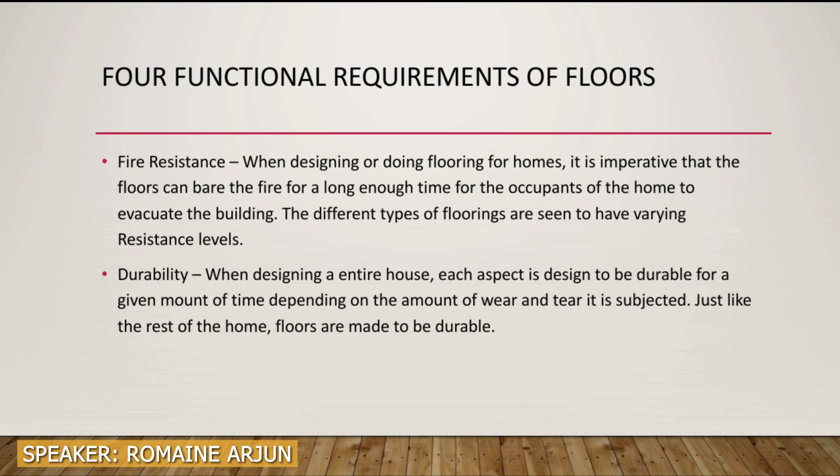The next functional requirement is the durability. When designing an entire house, each aspect is designed to be durable for a given amount of time depending on the amount of wear and tear the floors or the home is subjected to. It is very common that a home is designed to last. So, as such, the flooring would be specifically designed to last as long or even longer than the home itself, as the floors would be bearing more load than most of the other parts of the house.

Another functional requirement is the resistance to weathering. Houses are built on different soils of different areas with different water tables, which can have different moisture contents or moisture conditions of the soil. For floors, depending on the design and the soil at hand, this could affect the ground moisture and the resistance to weathering of the floor. So, the floor will be designed in a specific way to resist the weathering.

And last but not least, the strength and stability. The strength is linked to the durability of floors. Floors are made to have a high level of strength as they are subjected to different and varying loads, whether it be human, objects, furniture, etc. Maybe even vehicular loading. The stability of the floor is to ensure that the floors remain level.

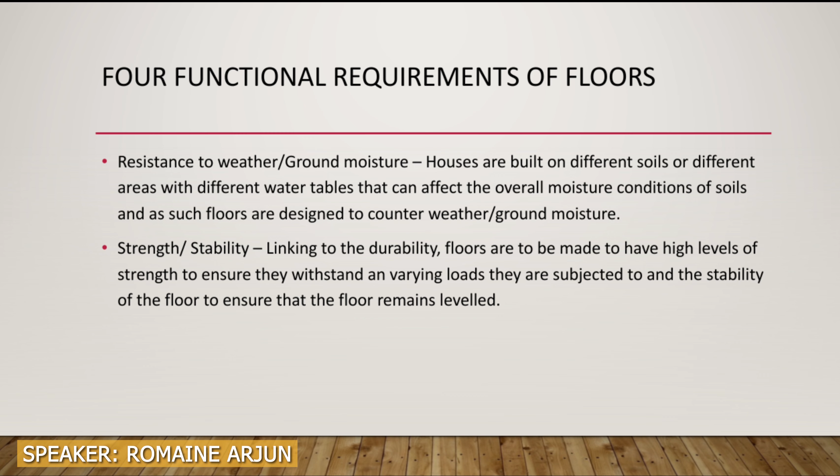As such, when items such as furniture are placed on the floors, it can be seen that the floors will be subjected to more load in certain areas than in other areas. This can cause the floor to be unlevel depending on how well the floor is made. So the stability of the floors should be taken into consideration during the construction process to ensure that the floors will be level for the varying loads and for the varying time.

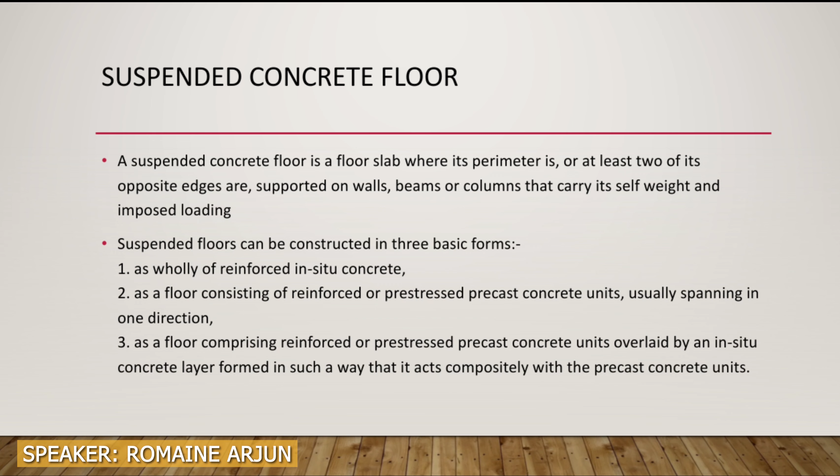Suspended concrete floor. A suspended concrete floor is a floor slab where its perimeter, or at least two of its opposite edges, are supported on walls, beams, or columns that carry its self-weight and imposed loading. Suspended floors can be constructed in three basic forms. Form 1, wholly of reinforced in-situ concrete. Form 2, as a floor consisting of reinforced or pre-stressed precast concrete units, usually spanning in one direction. And Form 3, as a floor comprising reinforced or pre-stressed precast concrete units overlaid by an in-situ concrete layer formed in such a way that it acts compositely with the precast concrete units.

Here we have two images showing the suspended concrete floors. In image 1, you can see where the beams are being stretched across and blocks are being placed in between the beams. And image 2 shows a side view of how a suspended concrete floor would look.

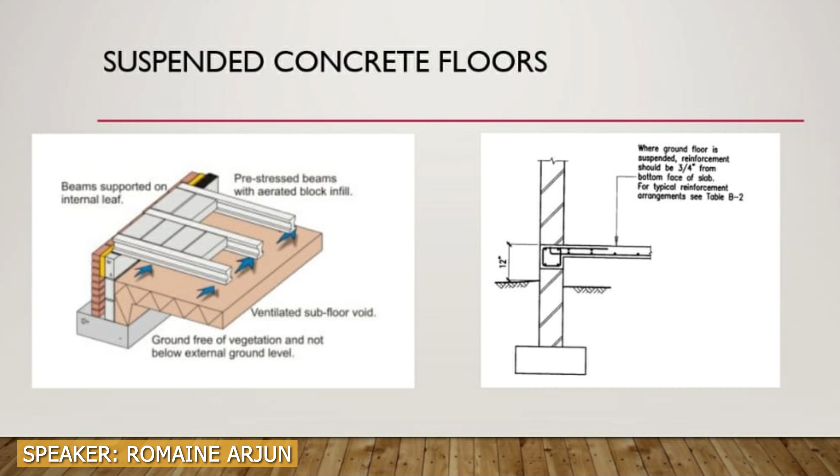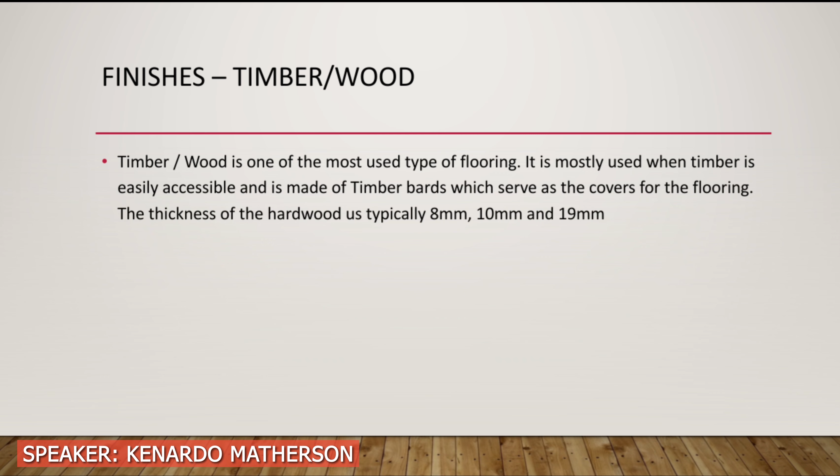Okay, so this is Kenardo and I'll be looking at the floor finish. I will be focusing on timber or wooden floor finish. This is especially used when the wood is easily accessible, and the thickness of the hardwood used is usually between 8 millimeters, 10 millimeters and 19 millimeters.

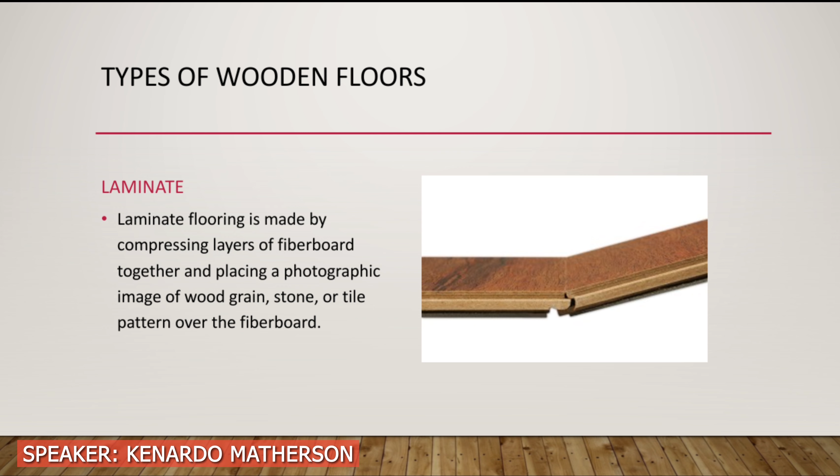Okay, so the types of wooden flooring. First we'll be looking at laminate wooden floors. This flooring is made by compressing layers of fiberboard together and placing a photographic image on top of them. The image would be of wood grain, stone, tile pattern or any desired pattern, and the image is added to the surface, and a protective coating, which we'll talk about later, is added on top of it to prevent damage. This one is ideal for living areas and is mostly waterproof.

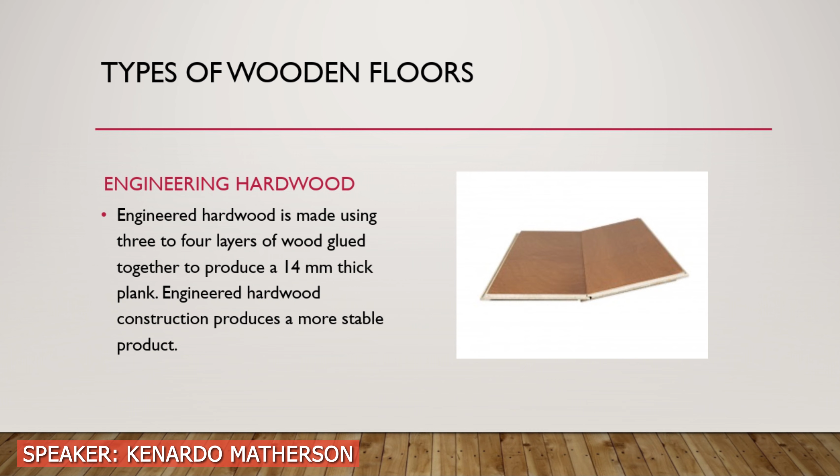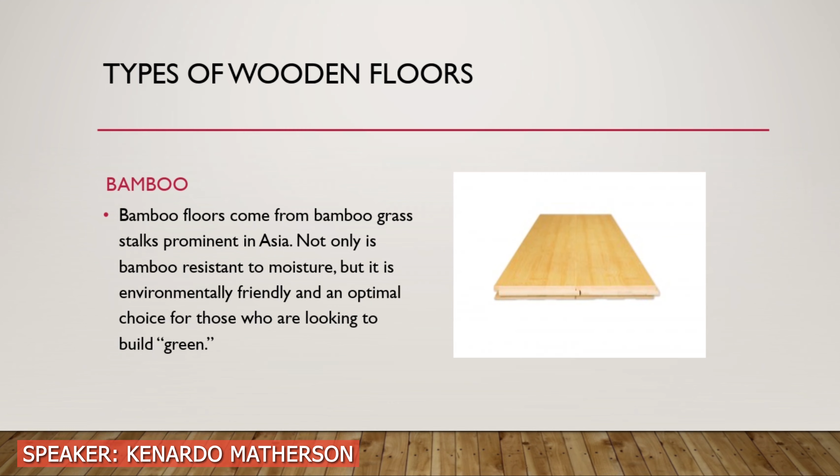Now we'll be looking at the bamboo wood floor. It's usually found in Asian countries where bamboo is more abundant, and due to the characteristics of bamboo itself, it's more moisture resistant, environmentally friendly, and is the best choice for building green. It's low in cost in these areas and is fairly durable.

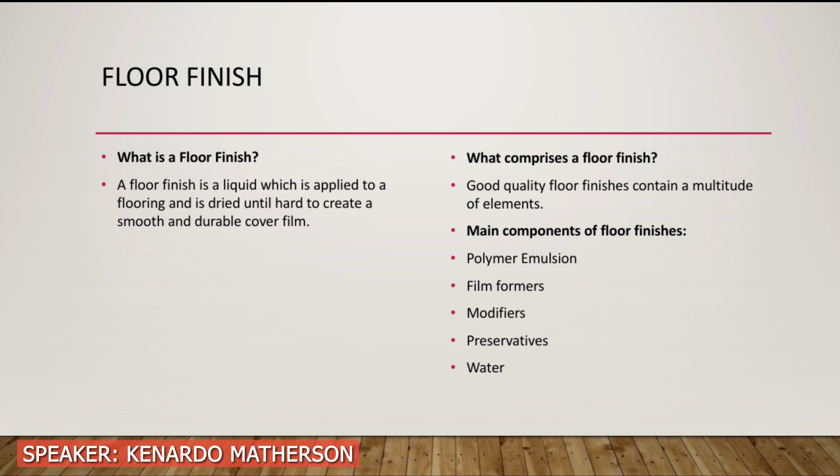Now we'll be looking at the floor finish coating that is put on top of the wooden flooring itself. This floor finish is usually a liquid made of different components. It's basically a chemical, and the thickness of this coating is usually 25 microns, which is 0.025 millimeters thick. So what comprises the floor finish? Its main components are usually polymer emulsions, film formers, modifiers, preservatives, and water.

So now looking at the types of floor finish coatings. First one is oil modified urethane. So this is one of the most widely used types of floor finishes because it's easy to apply. It's made from a petroleum base and contains plasticizers. So the coating is resistant to moisture, as we'll see from many of these different types of floor finishes.

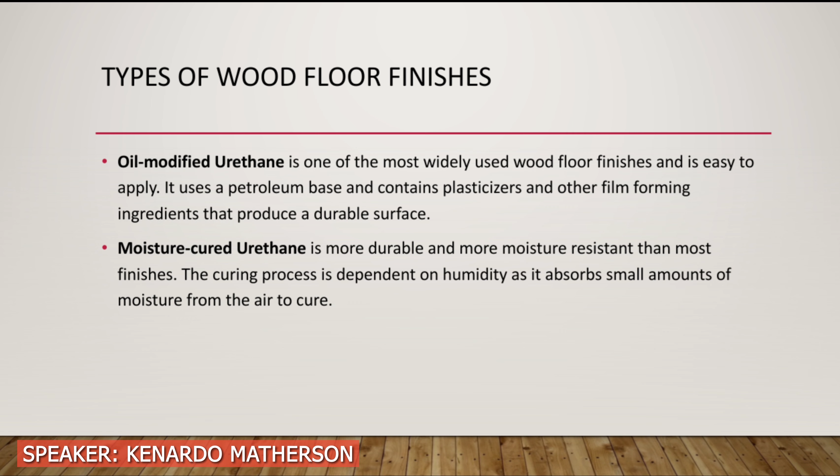So there's also the moisture cured urethane, which is more durable and more moisture resistant than the oil modified urethane, but it is similar in other respects. It also has a non-yellowing component in it, so it doesn't turn yellow over time, and it can be difficult to apply, and the curing process is dependent on humidity.

For the water-based urethane, this contains synthetic resins, plasticizers, and other film-forming ingredients. It creates a durable surface which is moisture resistant, as I said, with most of these finishes, and it's clear or see-through. It dries within about 2 to 3 hours after being applied.

So now looking at the penetrating sealers, these ones are applied to the floor surface and they are spread out and allowed to penetrate the wood surface over time. They are solvent based, and this type of finish often comes with color and can be used to stain and seal the wood flooring.

So looking at the paste wax finish, this one is the easiest to apply and it's typically inexpensive and fast drying, and it's also easy to repair because its main component is wax, and it is applied in thin coats for surface protection.

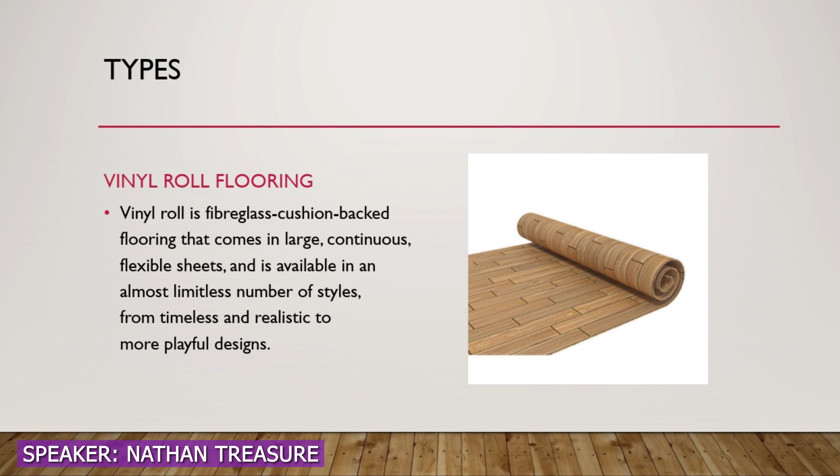Now, vinyl roll flooring is a fiberglass backed flooring that comes in large, continuous, flexible sheets and is available in an almost limitless number of styles, from timeless to realistic and playful designs, which simply means that it has a variety of different styles, from formal to playful designs like kids, etc. Now, this type of flooring offers great water resistance, making it a perfect material for use in bathrooms, kitchens, and other high moisture spaces in the home or commercial space, such as basement or washroom, etc.

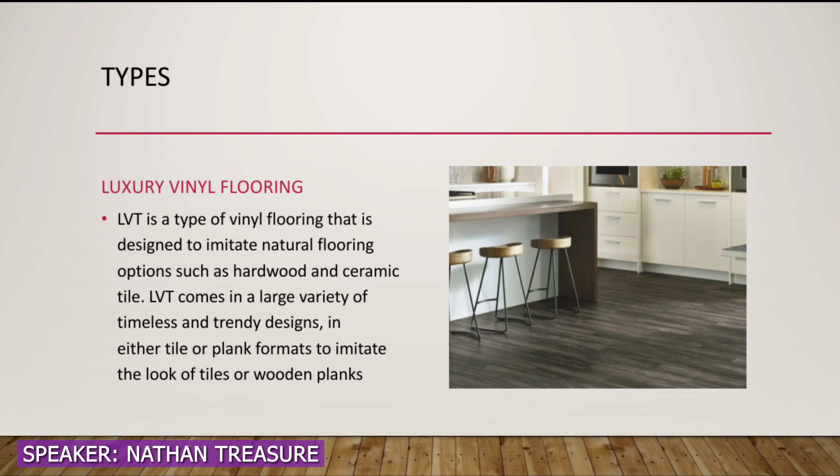Now, luxury vinyl flooring is a type of vinyl flooring that is designed to imitate natural flooring options such as hardwood and ceramic tile. Now, it also imitates other different flooring styles such as tiles and wooden planks, and it also comes in rigid or flexible tiles.

Now, there are numerous advantages and disadvantages of vinyl floor coverings. Now, some of the advantages for vinyl floor covering is that it's a very tough material that stands up to both moisture and heavy traffic. Hence why it is recommended to use in both bathroom and kitchen, as it's very moisture resistant. Another advantage is that it is comfortable and quiet on the feet, which the majority of people like. They like to feel comfort in their home and that the material used is very comfortable. Another advantage of using vinyl flooring is that it's very inexpensive and durable, as well as having a wide range of colors, designs, and patterns.

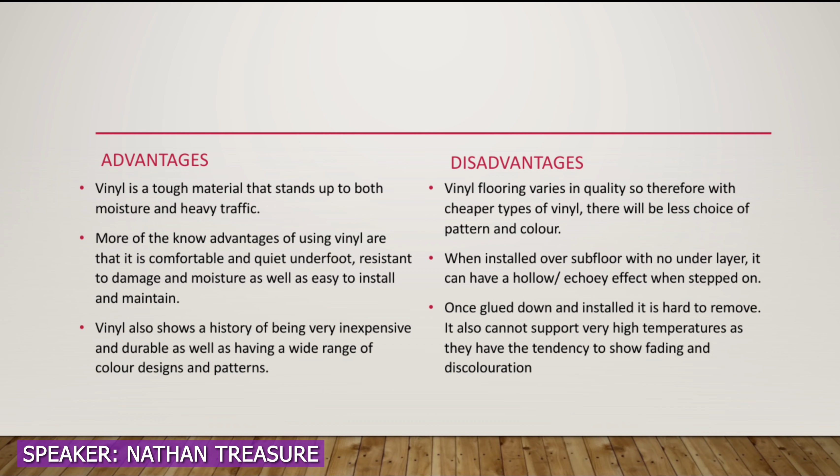Now, a couple of the disadvantages of using vinyl flooring is that it varies in quality, meaning that depending on the type of vinyl you use, it's very cheap and probably inefficient and is not recommended to use, and that the different patterns and colors vary per the quality of vinyl you purchase. When installed over subfloor with no underlayer, it can have a hollow or echoey effect when stepped on. Another disadvantage is that once glued down and installed, it is hard to remove. It also cannot support very high temperatures, as they have the tendency to show fading and discoloration, which no one really likes.

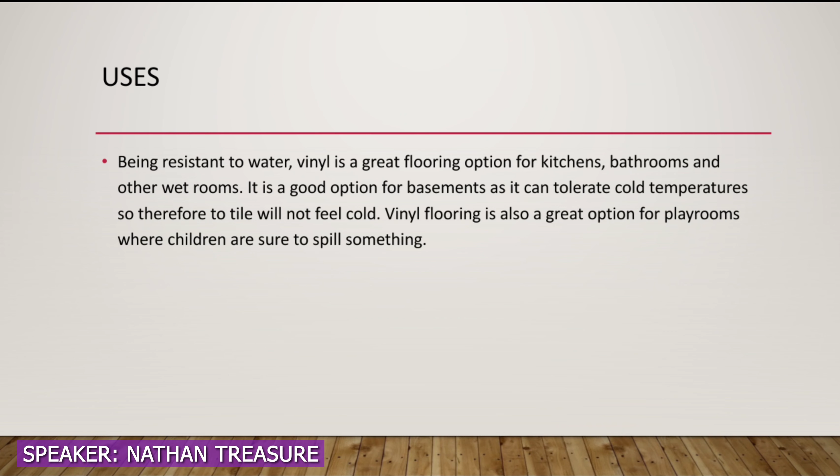Now, for uses, as stated plenty of times before, some of the best uses of vinyl flooring is being resistant to water, hence why it is recommended to use for kitchen, bathroom, and wet rooms such as basement. It can tolerate cold temperatures, and therefore the tile will not feel cold. Vinyl flooring is also a great option for playrooms where children are sure to spill something.